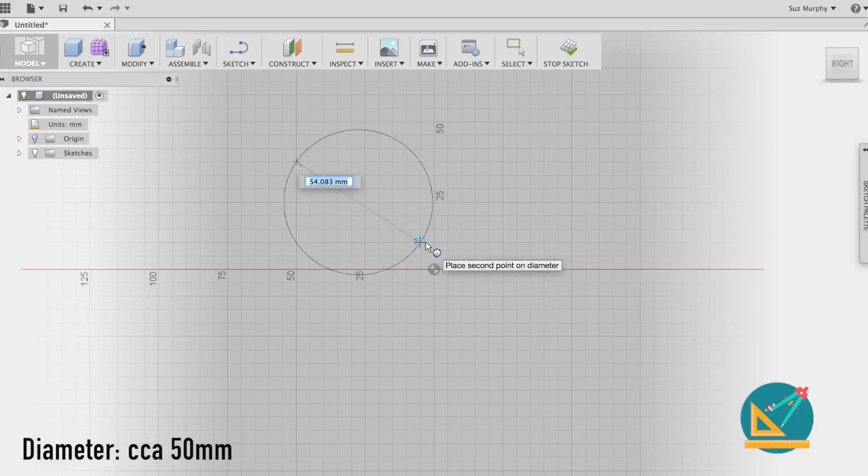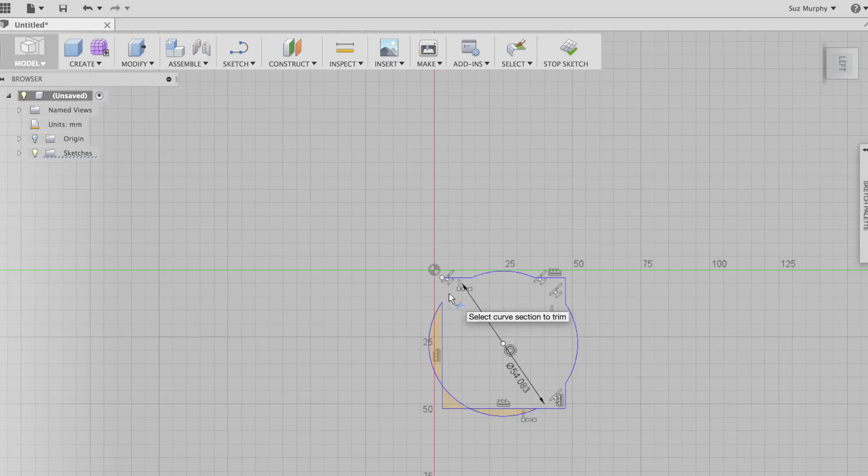Then we're going to go up and take the square tool, so now you can see we have the square inside of the circle. I press escape, that helps me to not be sketching tools anymore. So I want to select all of them, then I want to trim the inside. I'm going to go to sketch, trim, and take out these portions that we don't need. Okay, so that looks good.

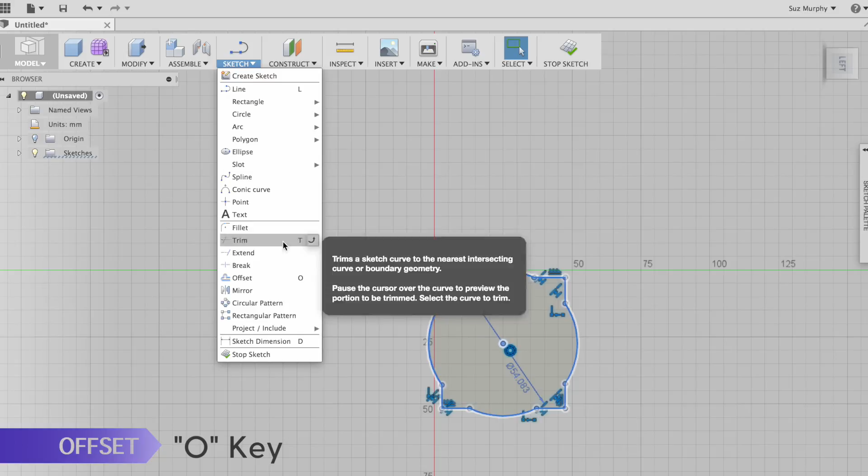Select all of them. And then what we're going to do to create the two-dimensional rendering that can become a three-dimensional shape is we don't just want this to be one solid. We want there to be space in the center because we want it to be a hoop earring. A great easy way to do that is to go up to sketch and then offset. That has offset it 3.5 millimeters, which is pretty good, but I think it looks a little thick for me, so I'm going to make it 3 millimeters.

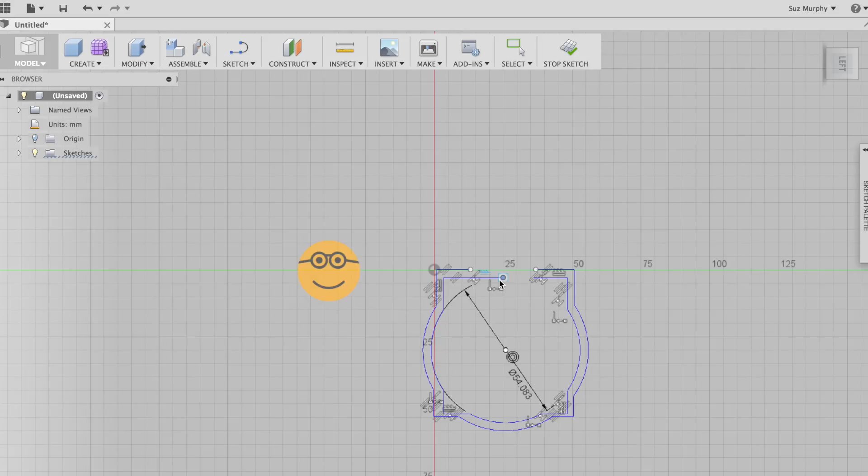Now I'm going to go to the top and delete these portions here because we want it to be a hoop earring with a post. What I'm going to do is extend those pieces a little bit so that can be the post for the hoop earring, where the hoop goes in. Then I'm going to close these vectors, because when you make a three-dimensional shape, everything has to be closed—you can't have open spaces. So that looks good. Select all.

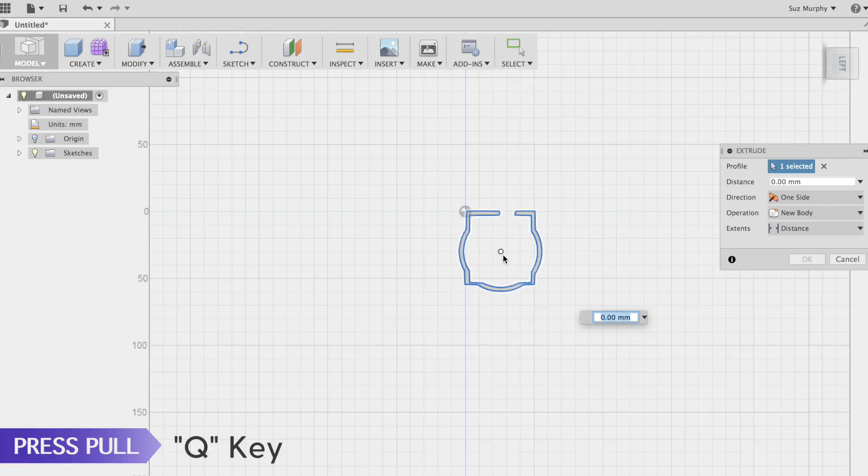We're going to use modify, press pull, to create a three-dimensional shape. We have the object selected and I want it to be about 4 millimeters thick. I want to make the edges more delicate looking, so I'm going to fillet out the edges here.